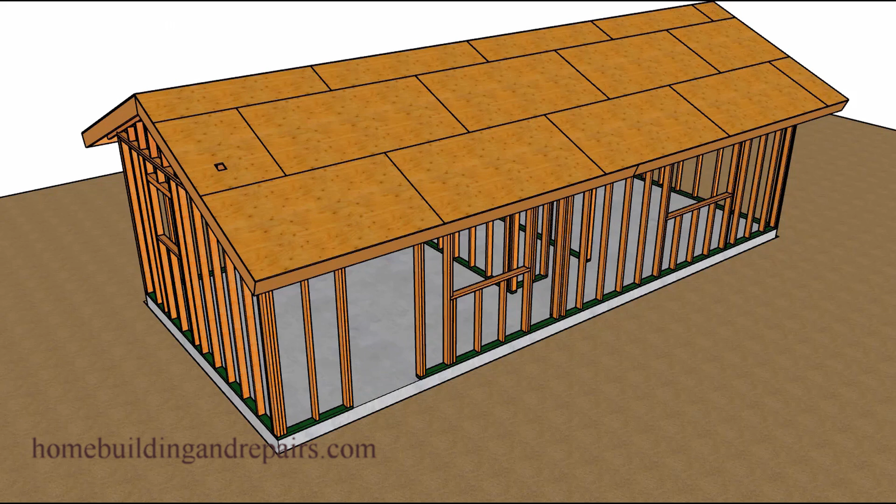In this video, we are going to add a small 7-foot by 12-foot covered patio to the front of our 434 square foot house. This will involve pouring a concrete slab and removing some of the roofing and roof sheathing.

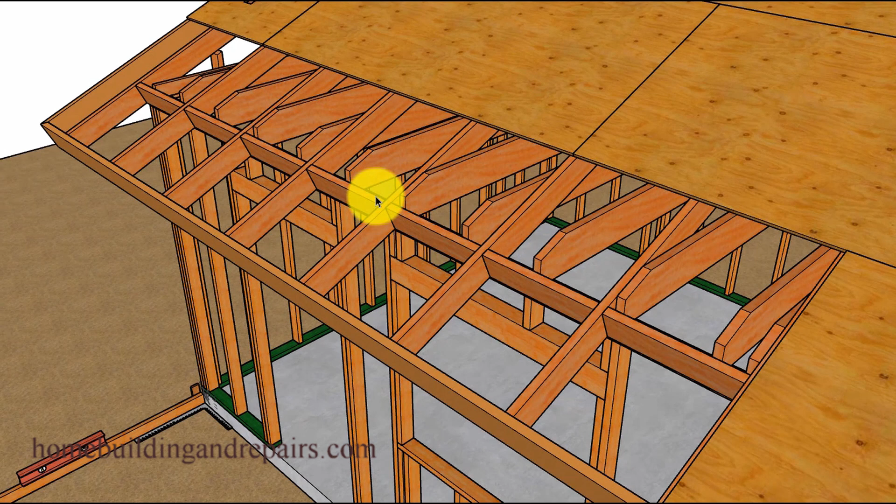Now, the first thing I want to point out is that you might not need to remove as much of the roof sheathing as I did. I'll leave it up to your best judgment on what you need to remove to actually build the roof. Along with the roof sheathing, you will need to remove some of the rafter blocks. Just don't remove more than you need.

For example, once you get over into this section, you might want to leave this block and leave some of the fascia board sticking out a little longer than you think it needs to be. In other words, if you cut it and it needs to be about 3 inches longer, you're not going to be happy with yourself.

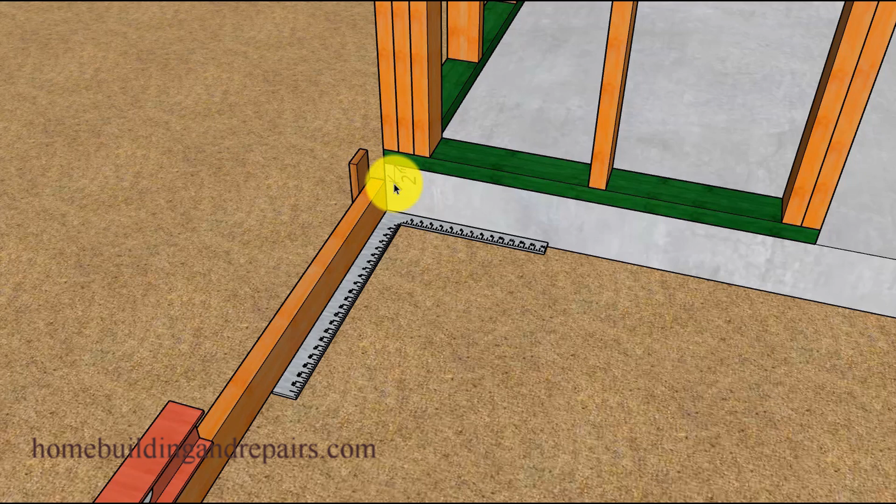Now we're going to use a framing square to square up the patio. To do that, you simply set one side of the framing square up against the building and the other side against your form board. Another thing that might vary in your area is this 2 inches, which is usually the minimum distance between the top of your floor or concrete foundation and the top of your patio. However, these sizes can differ, especially if you're dealing with ADA access.

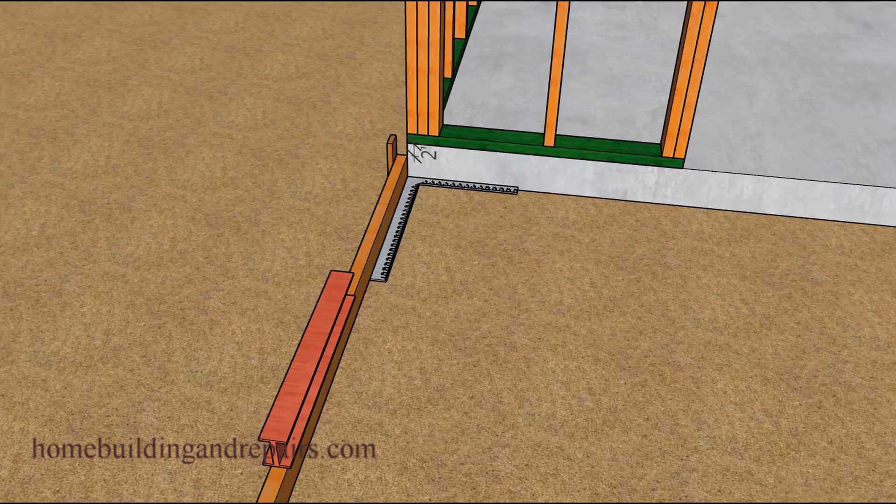Once we have the form board nice and square, we can drive a couple of stakes into the ground and then grab our level to level it off. Once it is level, we will mark this stake over here.

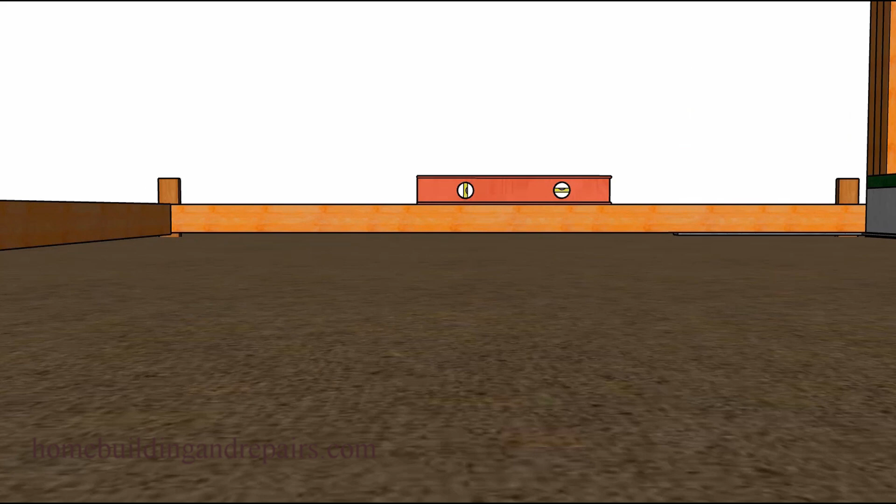We're simply going to draw a line across the top of it so we can figure out how far to drop this end of the form board to create a 1/4 inch per foot slope. Since we're coming out 7 feet, and 1/4 inch per foot is the minimum, I'm going to drop it an extra 1/4 inch to create 2 inches of slope. If you did the math, it would come out to 1 3/4 inches.

After that's done, you can set the rest of your form boards and dig out whatever you need for your concrete patio slab. In our case, we're going to have a footing at each end, 12 inches by 12 inches and 12 inches deep.

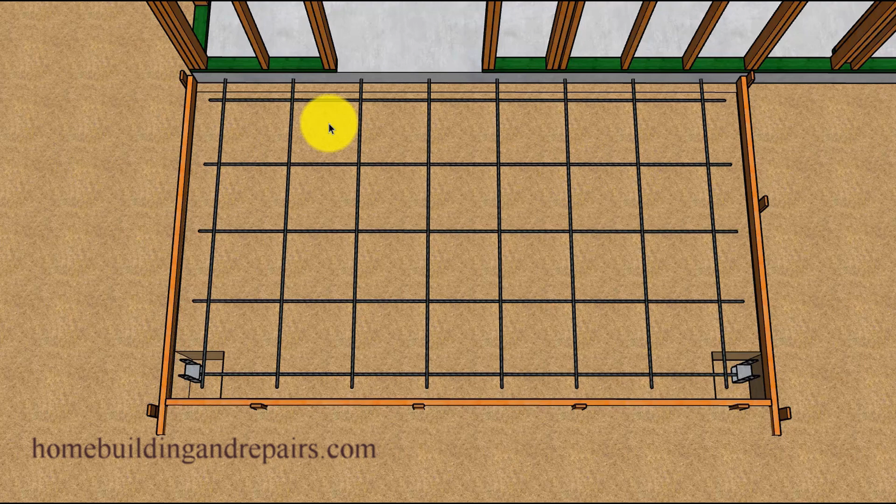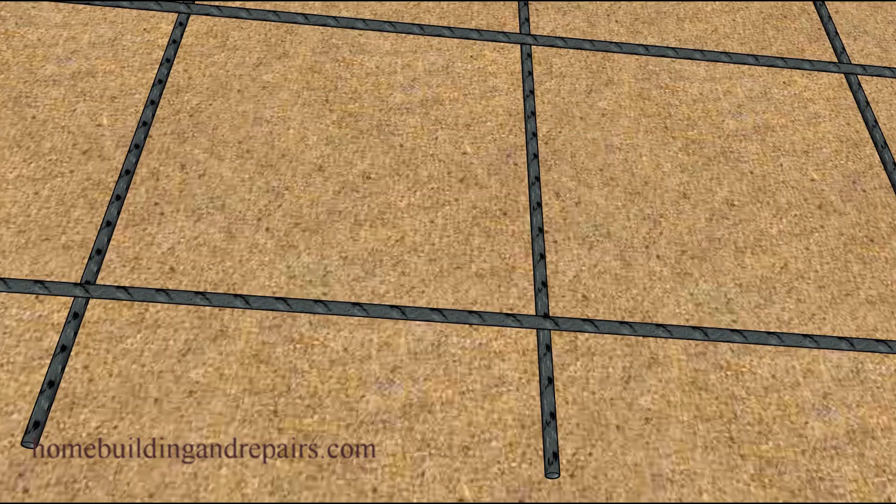Next up, we will set our rebar, spaced 18 inches on center in both directions. If you're planning on building the patio with the house, you could extend the rebar into the original footing and even tie it to the rebar in the original foundation. If not, you might need to drill holes and dowel the rebar into the footing. However, this might not be necessary—you could simply install the rebar spaced 18 inches on center or 24 inches on center. I'm using number 4 rebar, or 1/2 inch rebar.

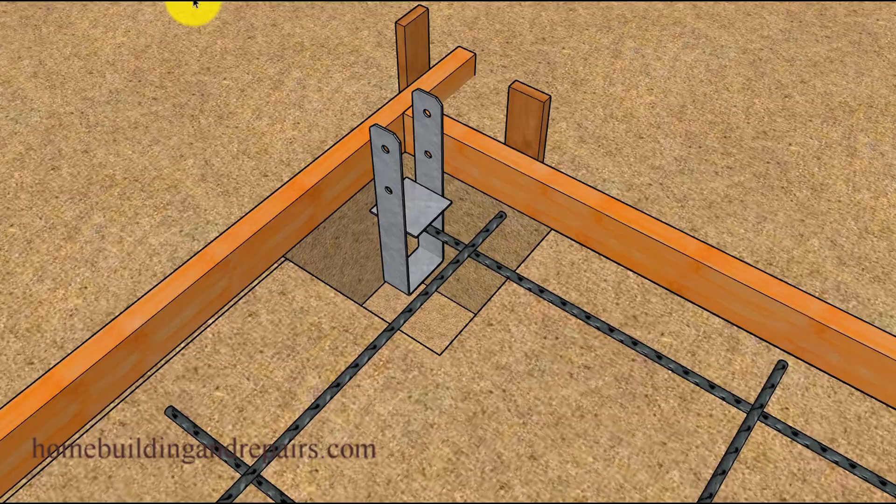We will also be installing some type of post base connectors, which you can usually find at your local lumber yards. They basically center into our footing, and your footing sizes might need to be different too. Not too difficult—let's go ahead and pan out.

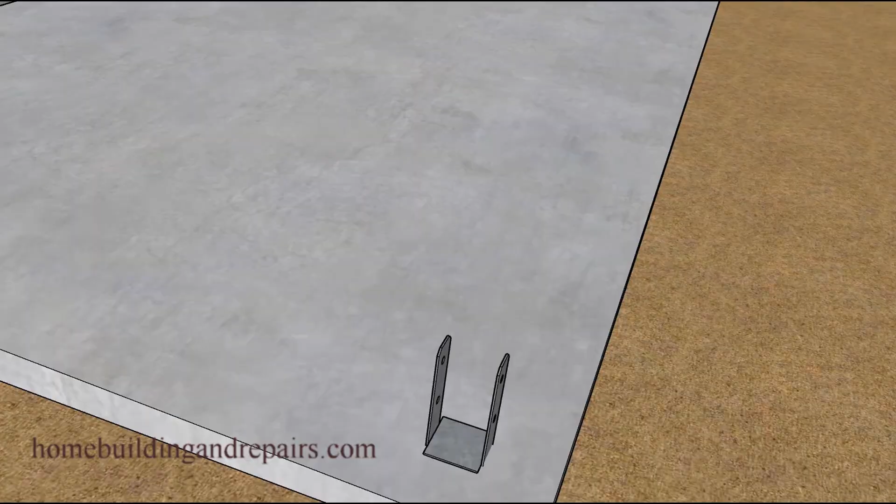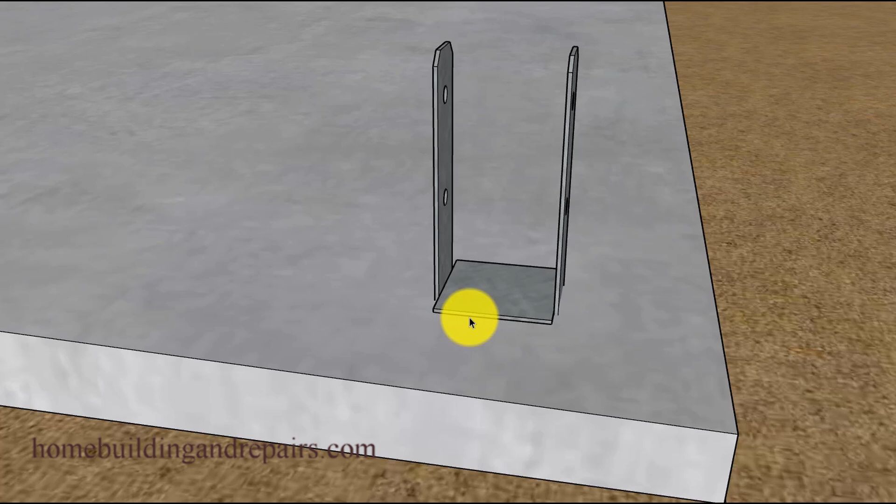And there's our rebar. Next up, we will pour the concrete patio slab and strip the forms, of course. Take a look at our post base connector, which should be about 1/4 inch off the ground. I like to pour the concrete to the bottom of the metal here, but I've seen people raise them up a bit if needed.

Now, to figure out the height of the posts that will sit in the connectors I just showed you, you could grab a 2x4, set it on top of the patio foundation, and go all the way up to the top of the wall, then subtract the height of the beam from that measurement. In our scenario, we're going to be using a 4x8 beam.

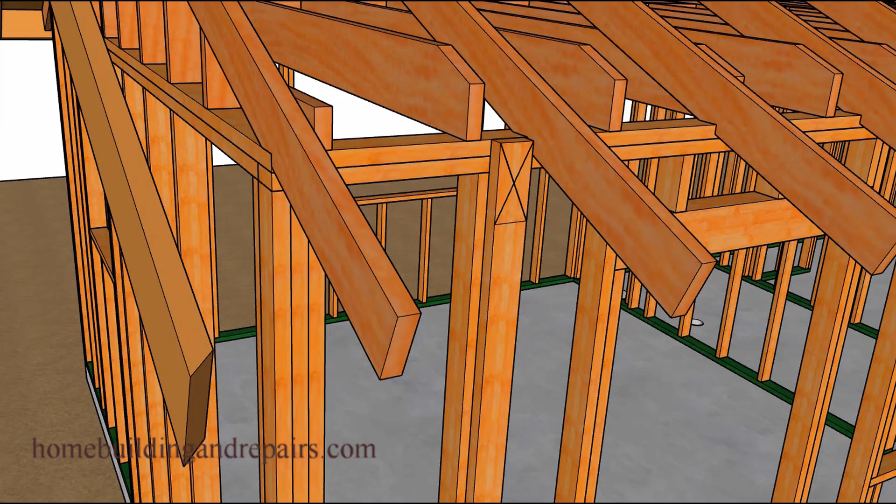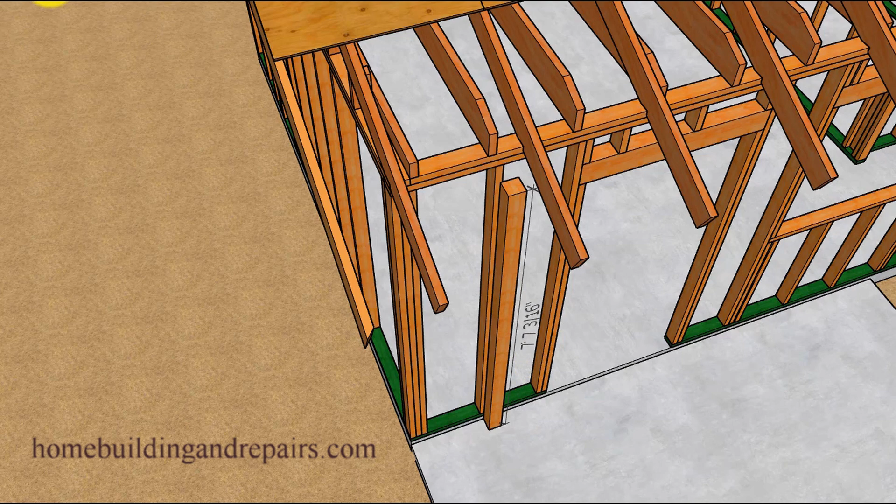My thought for something like this is that we already have 1/4 inch of slope on the patio slab. If we want the roof to slope 1/4 inch per foot, we can use this measurement to create that slope on both the bottom and the top. You should always check the measurement—here we have 7 foot 7 3/16, and I believe most building codes require a minimum of 6 foot 10 inches, so in reality we have plenty of room.

If I wanted to change the pitch of the roof to 1/2 inch per foot, all I would need to do is take 2 inches off the top of the post.

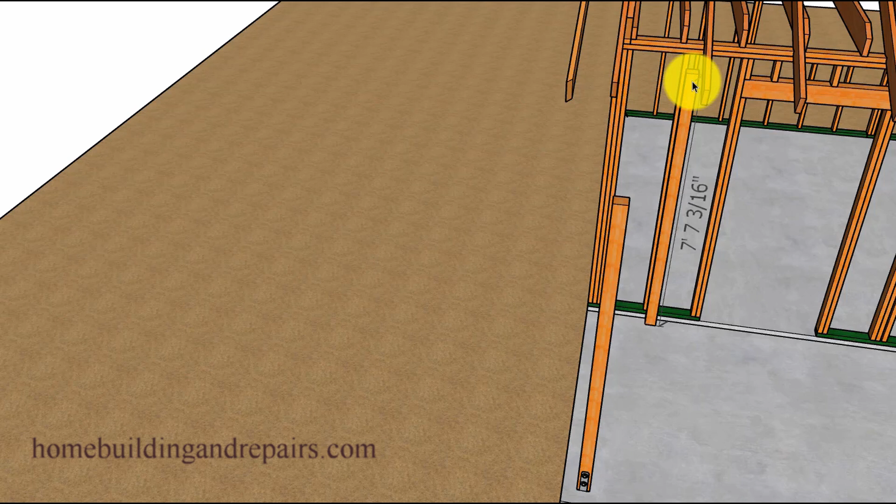If I wanted to make a 1 inch per foot slope, I would simply adjust the post accordingly, and I believe that would be 6 more inches. And that would still provide us with over 7 foot 1 inches of headroom clearance and help the water drain off of the roof a little faster.

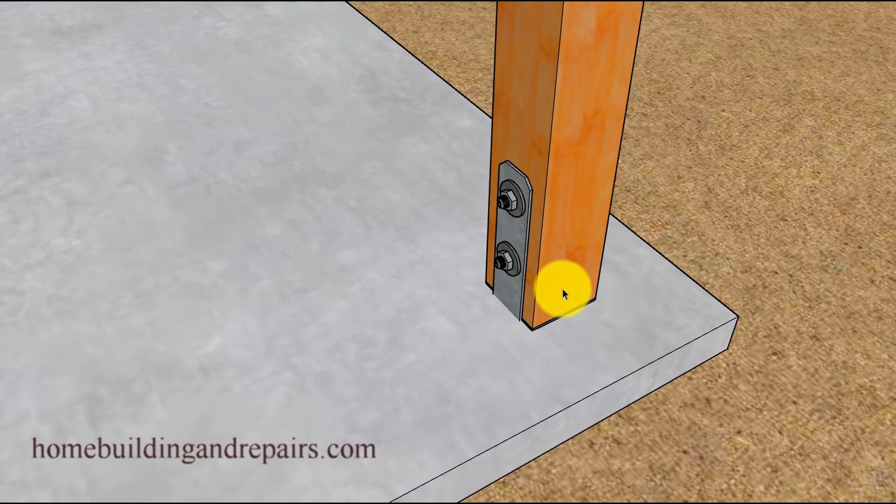Make sure that you have all of these calculations done before, not after, you install your post. However, it might be better for you to put the post and beam into place if you're having a difficult time wrapping your mind around how to figure out the slope of the roof rafters.

The next step will be to place some type of a straight edge, or your roof rafter, or even a 2x4 or a 2x6, on top of the beam and on top of the framing plates to check the slope of the roof rafter. It's not going to be too difficult to do.

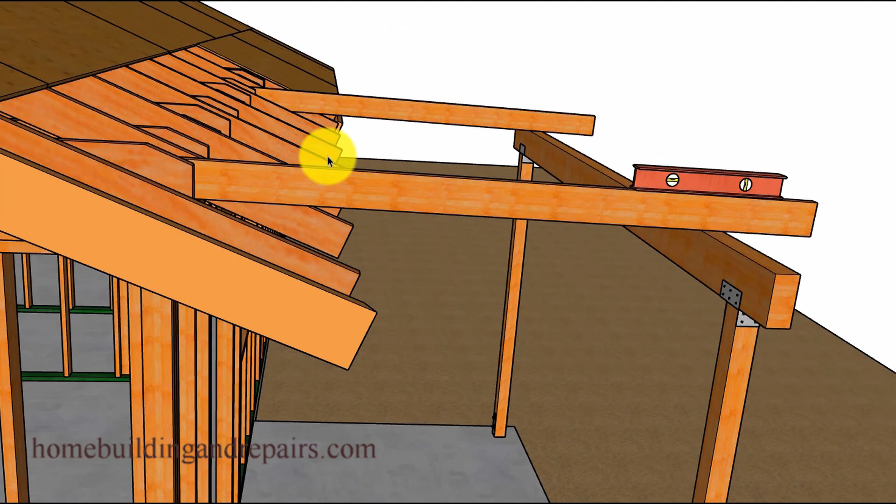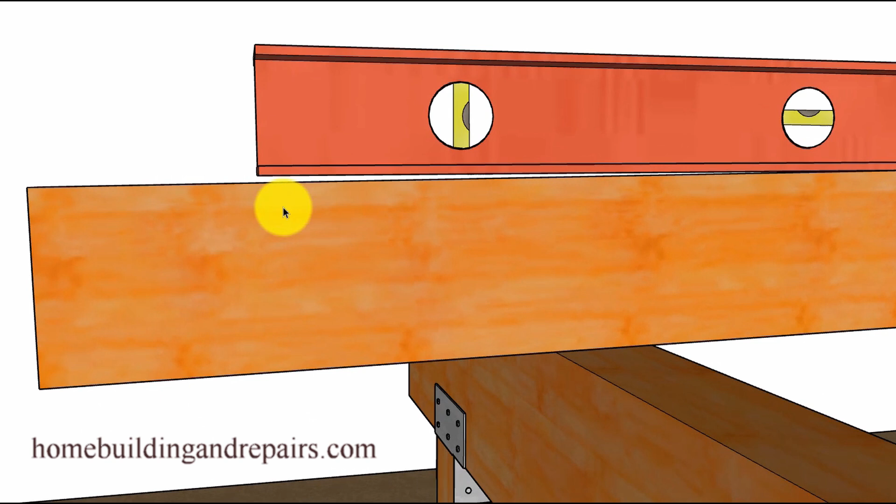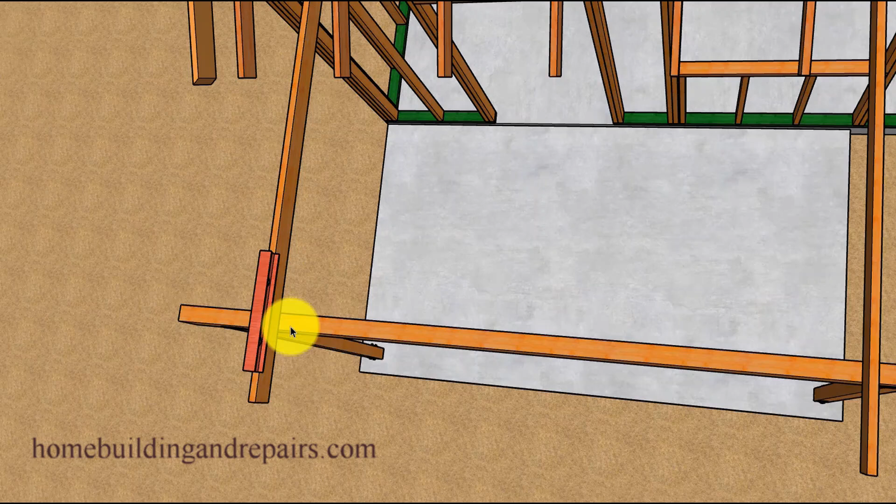Just grab a level, and in this case we're using a 2 foot long level. If we have a 1/4 inch per foot slope, then the distance between the bottom of the level and the top of the roof rafter should be 1/2 of an inch. For example, with a 1 foot long level, the distance should be 1/4 of an inch. With a 4 foot long level, it should be 1 inch.

Another thing I do when building patios like these, to speed up the process, is nail one of the roof rafters into place at each end and then level or vertically plumb up the posts so that they are plumb in this direction, or vertically straight.

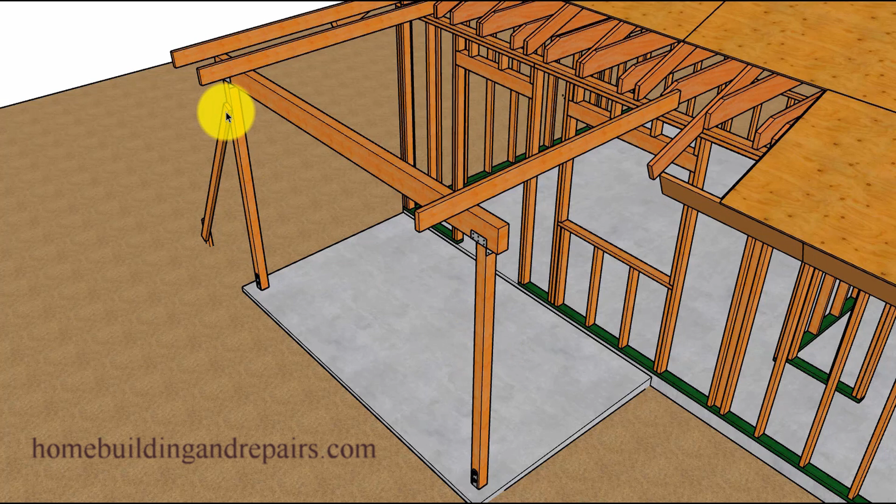Even though I showed you this method, you might be better off simply bracing all of the posts and plumbing them up in both directions using some type of bracing like this. Then set your straight edge or roof rafters on top to check if it's got the right slope. Use whatever is easier for you.

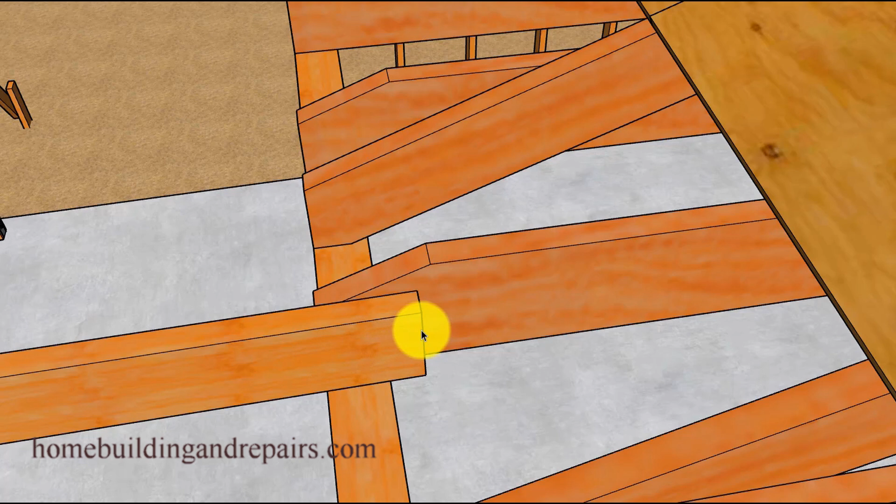Now let's take a look at the connection here, where you need to make sure that it is lapped on the correct side of the ceiling joist, because I actually built this model and had them lapped on the wrong side. I will show you what I'm talking about here in a few seconds.

Here is another cut you might need to get creative with. You can install the patio rafter like this and then notch around it, or just have the patio rafter sitting on top 1.5 inches or 2 inches. Keep in mind the minimum distance a rafter can sit on top of a framing plate is probably going to be 1.5 inches.

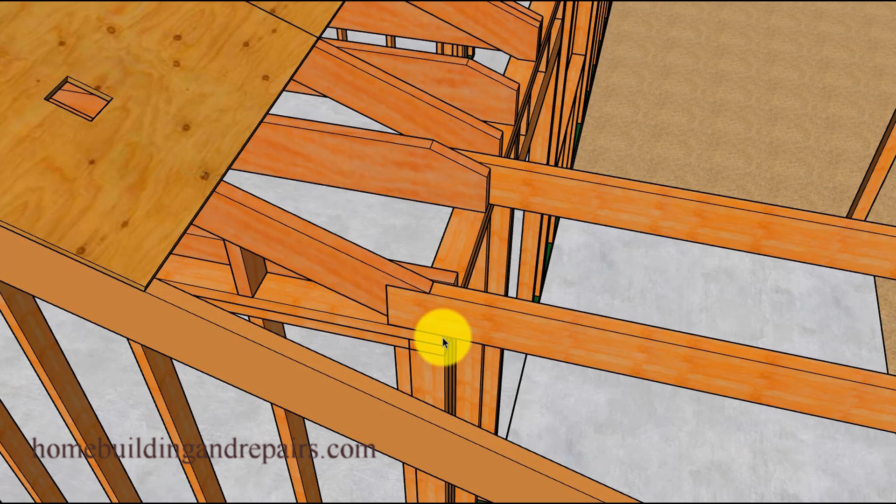So that's another thing that might help you when building your patio roof. And just another view to show that the gable studs will also help support the rafter here, if for whatever reason you believe you've cut too much out of the rafter and it doesn't seem like a nice structural connection.

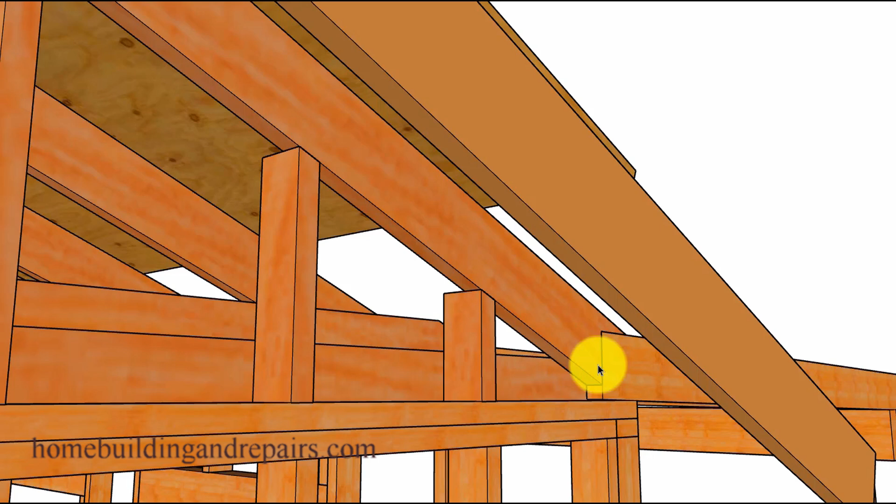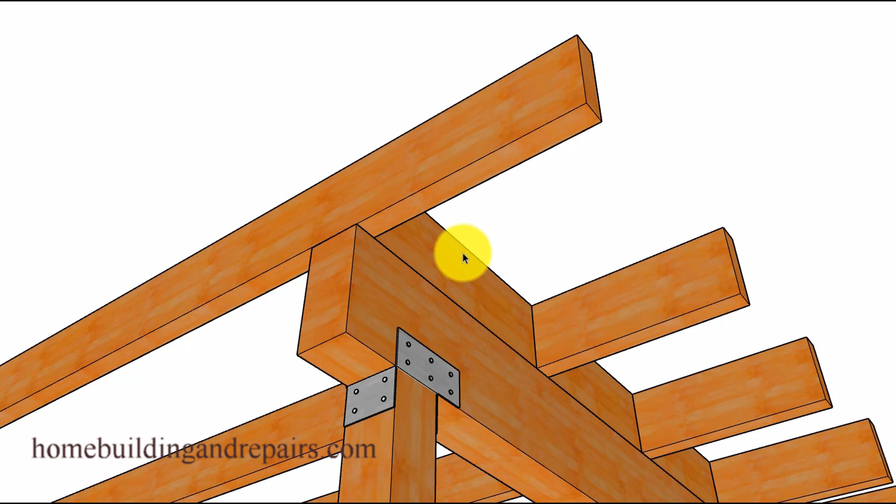Next up, we will install all of our roof rafters and our frieze blocks. We're going to set the blocks on top of the beam, and they are going to go even, or flush, with the outside of the beam.

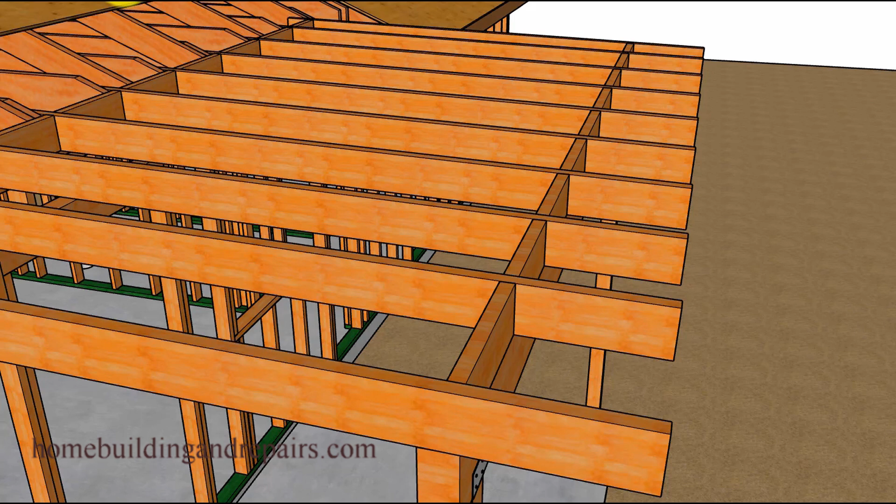All of our roof rafters are going to be 16 inches on center, and they are not going to have any seat cuts notched into them, because the slope of the roof isn't really that steep, or steep enough in my opinion to require one. But again, I'll leave that up to you if that's a design modification you want on your project.

Now let's take a look at the blocking here. In this case, we're going to bring it out past—if you have siding or stucco, maybe it can go out past that a little bit. This is going to help us create a nice finished edge at the bottom here.

As I mentioned earlier, these joists need to be located on the correct side. You can see there's not going to be a problem with this one, or this one, or this one, but if this one was located on this side of the ceiling joist, the rafter would be in the way. You could run into this same problem with roof trusses or other types of framing that might require layout modifications for your patio roof rafters.

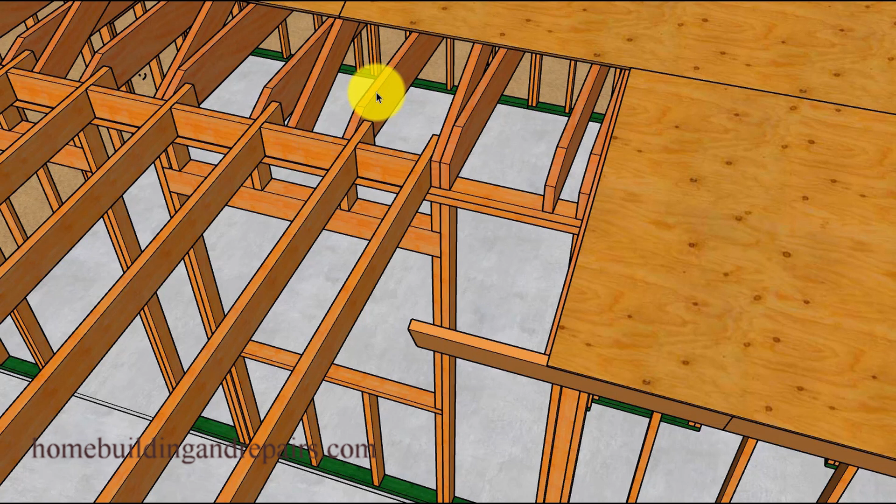For example, you might have 24-inch on center roof rafters like we have here, and 16-inch on center ceiling joists like we have here. And if for whatever reason the layout measurements for these rafters or ceiling joists change, then you might need to change the layout measurements on these also.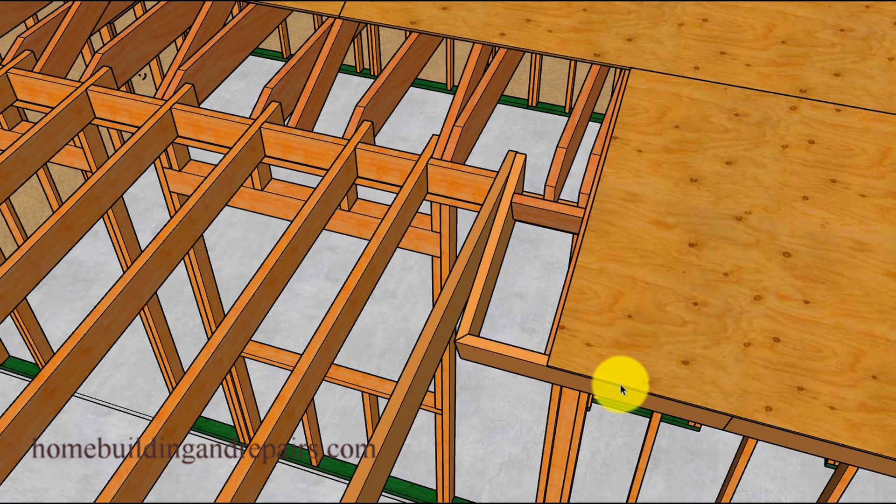Next up, let's go ahead and install our fascia board, and this is probably going to be about the trickiest part of this entire project. However, by providing you with a few examples of it, you should be able to figure it out.

We're simply going to set this piece of fascia board on top of the framing plate to provide it with a nice strong connection. It's sitting on something solid. I know some carpenters might want to cut it here, but that's not always going to provide us with the best structural connection.

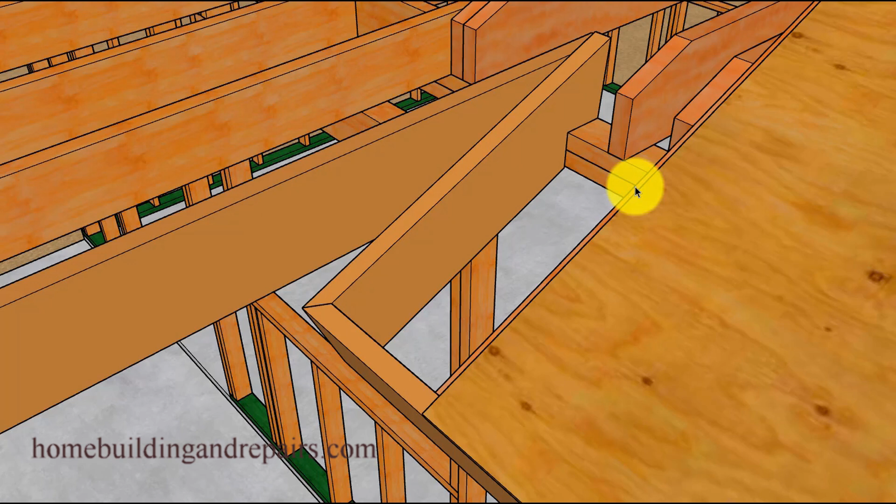Same thing here. Depending upon how far away this is from the other rafter, you might need to run this up a little further and create some type of a cantilever. Put our blocks in there, and our blocks of course are going to line up with the blocks on this side with this roof, and the blocks over here will line up with the other side.

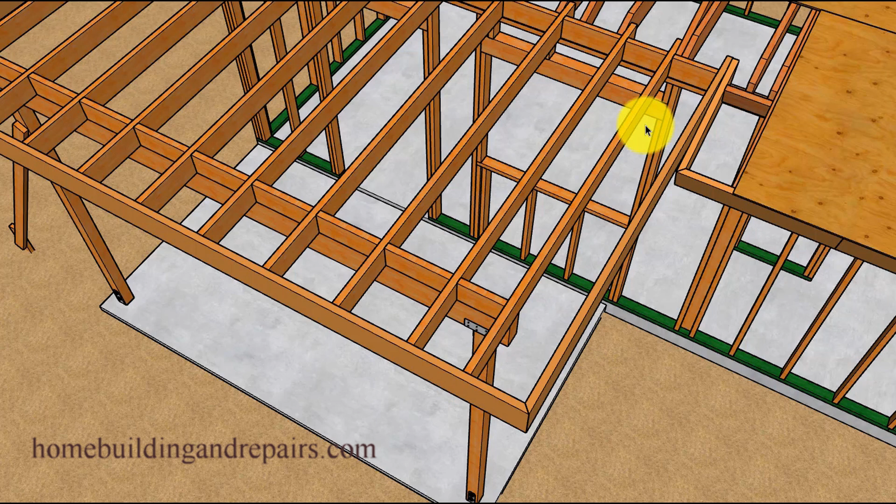We can see here from the bottom how they're lining up and how they are lining up on the other side, so we have a nice clean finish there. Since this is only about 8 feet, I'm not worried about putting any outlookers in here, and I've done this plenty of times where it seemed like it was nice and strong. View of the blocking and the fascia board there, using 2x8 for the fascia board.

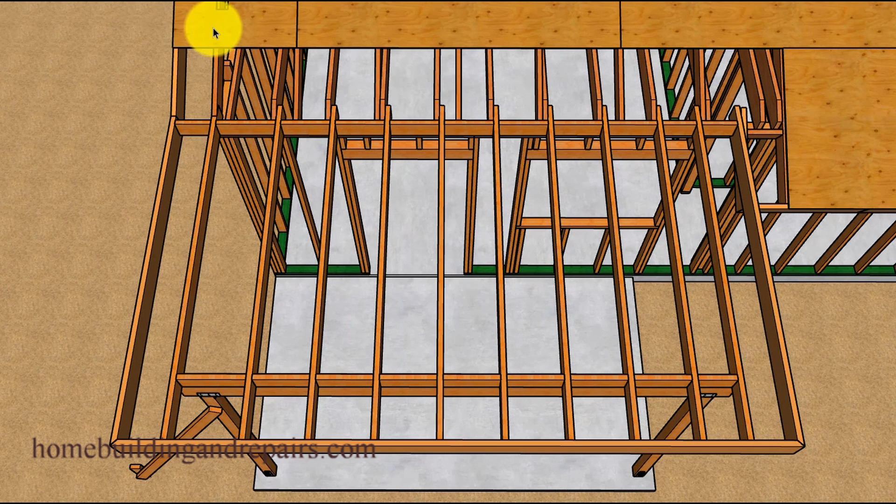This might be a more difficult cut for you to make, and I might even make another video on that. If I get enough people requesting it in the comment area, I will definitely make another video on how to join these two pieces of fascia board together.

The final phase for building a patio like this would be to install the roof sheathing, except for the fact that I ran into a problem here. Now, I didn't modify this. I could have easily made this plywood bigger with my modeling program, but I didn't want to do that. All of this stuff is to scale.

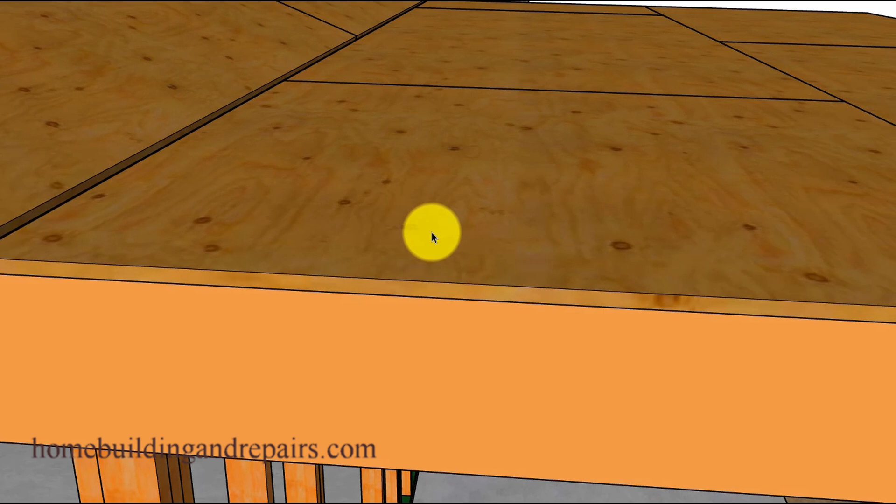When I was all done installing the plywood here, I'm almost an inch short if I line it up with the front here. However, since the fascia board is 1.5 inches thick and I'm still going to be able to get my perimeter nailing in here, I could simply move the plywood back, put a rip strip in the front, and everything should work out just fine. So this would be one way to solve this problem.

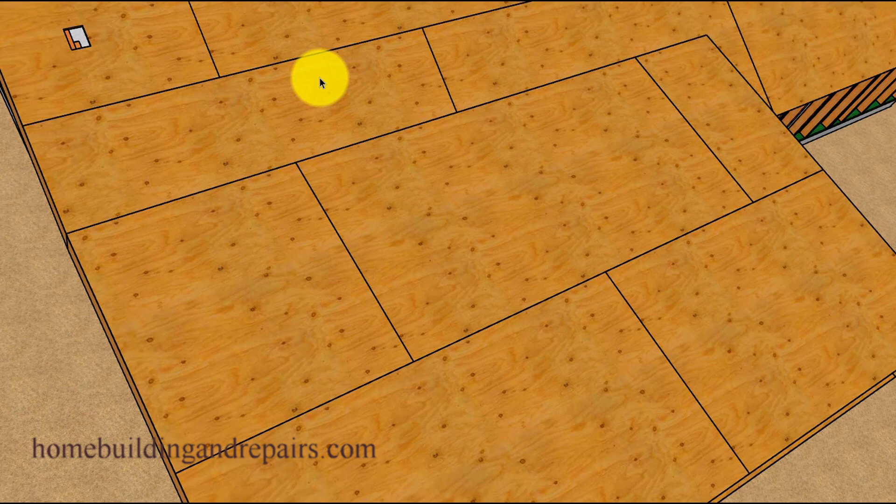Another thing you could do would be to simply grab your measuring tape and measure from here to here and see what the measurement is, because you might be able to just bring the fascia board back 1 inch or 2, whatever you need to solve that problem. Hopefully that makes sense.

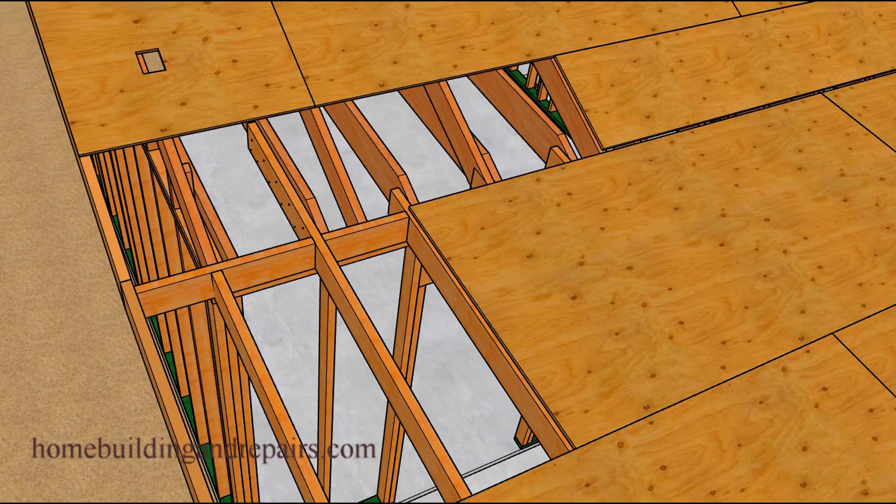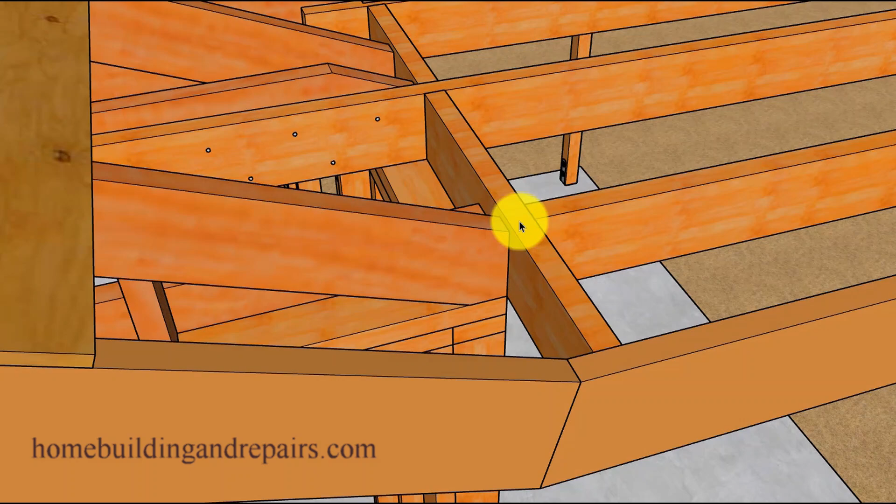Now I'm going to go ahead and go a little faster through this section of the video because it's running a little long. Another thing you can do will be to extend the length of the patio roof rafters so that you can get more nailing into the ceiling joist or the roof trusses, whatever you're going to be nailing it into. Another method might be to extend the block here a little farther so that you can add a little more structural support to this section of the fascia board.

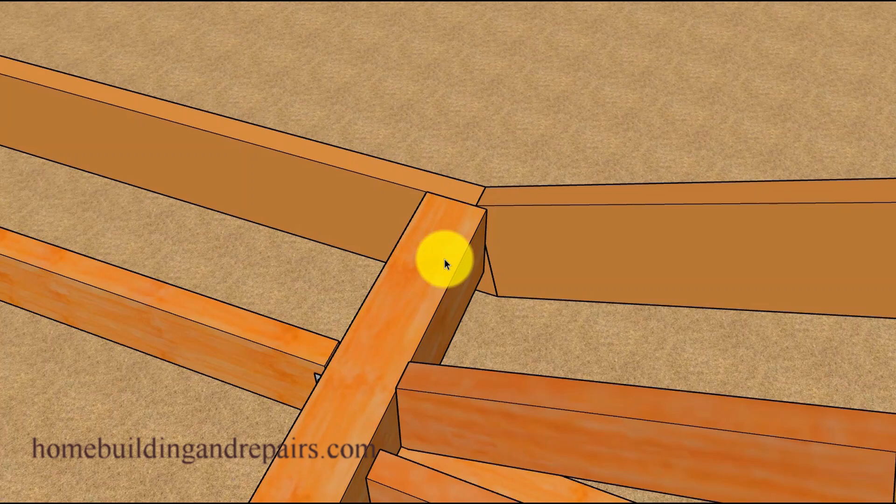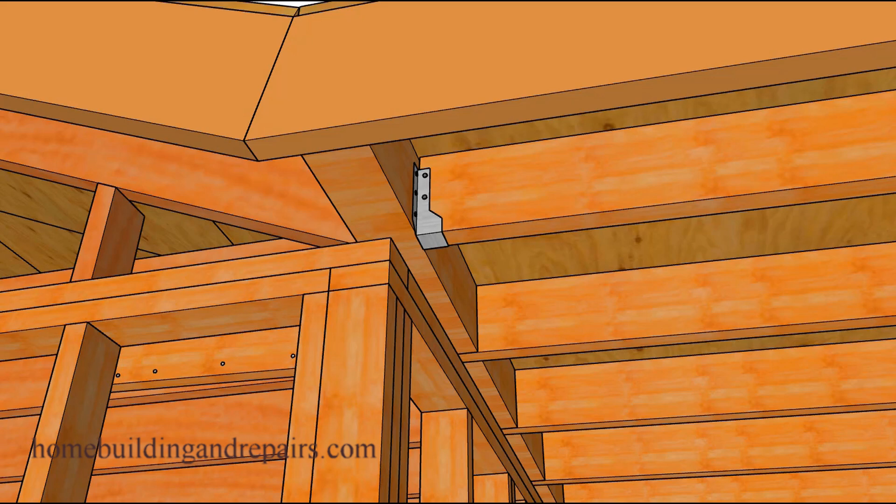Or you can use a wider piece of lumber and some joist hangers, and of course this one here is definitely going to be stronger. However, it might not be aesthetically pleasing to some type of an architect or designer because you got this big chunk of wood here. So again, just something else you can do to make what would otherwise be a structurally weak part of the roof framing into something a little stronger.

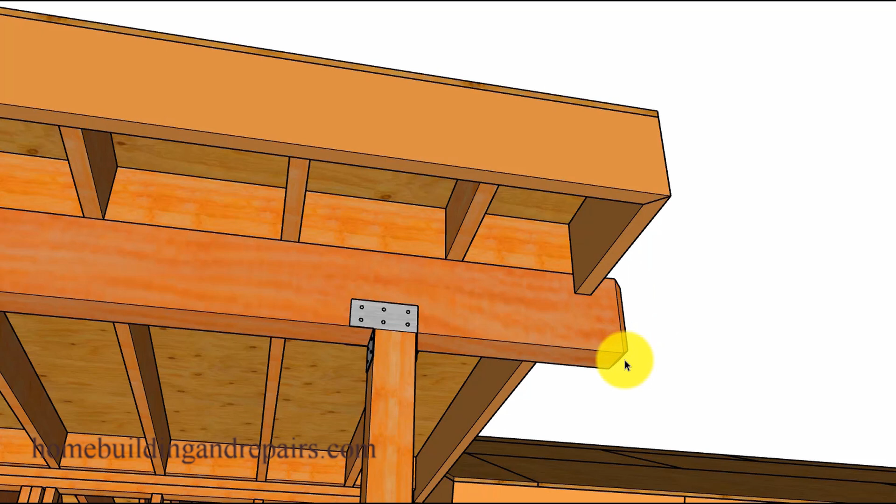We could always make this connection a little stronger by extending the beam a little further and then placing a block on top of it and then nailing the fascia board into the block. Another thing you can do would be to chamfer the edges here, and we will take a look at the other side to give you an idea of what the chamfered edges would look like if you don't like that square look. Here we've extended the beam a little further past the fascia board so that the fascia board sits on top of the beam.

And that is it for the video. Let's go ahead and wrap it up by just providing you with a few more views, give you an idea of what it looks like from underneath. A nice clean look here.

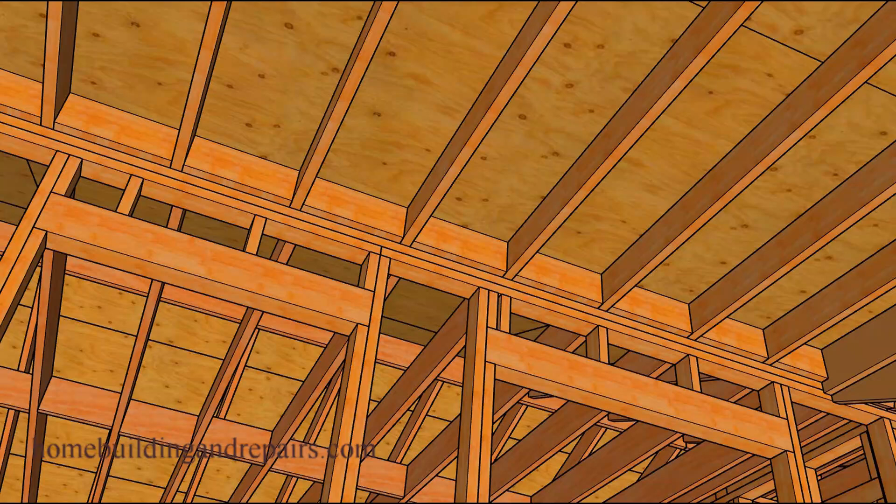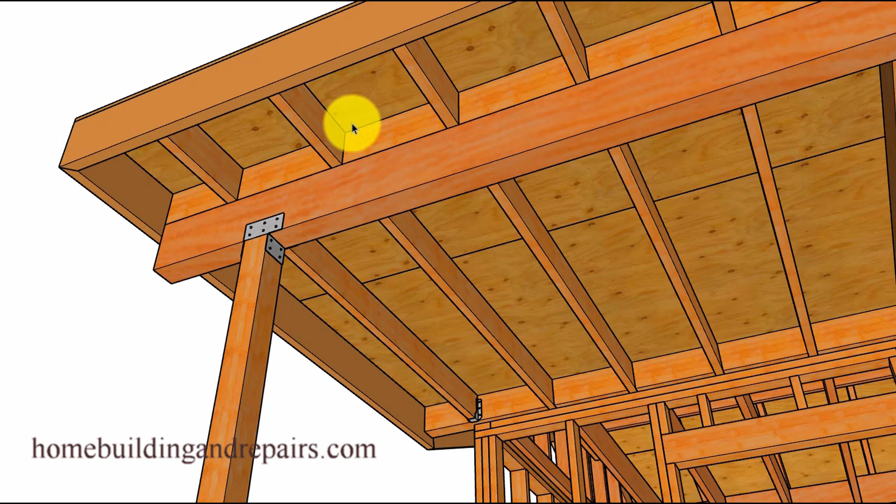You could always use T111 plywood or 1x6 tongue and groove if you want a different look from the bottom. I would also like to point out that if you do use 1/2 inch plywood here, expect all of your roofing nails and staples to come through the roof sheathing. So it wouldn't be a bad idea to use 3/4 inch plywood, or at the very least, while you're installing your roofing, come down and take a look at what it looks like from the bottom after you've installed a couple of nails.

I am sure that I have plenty of more tips, but this video has run way longer than most of my other videos, so I'm going to stop it right here.